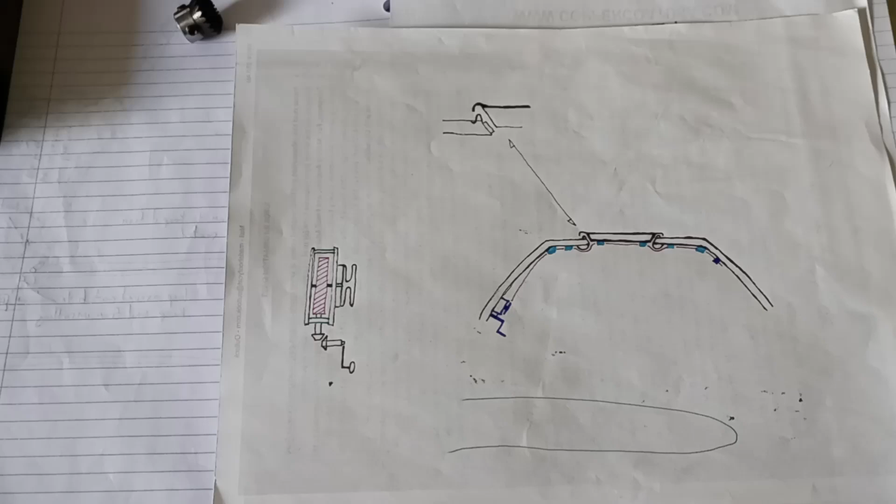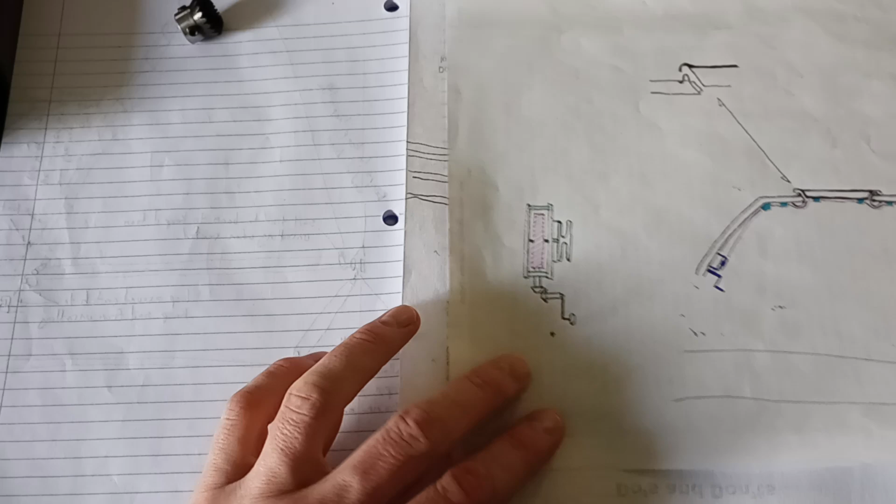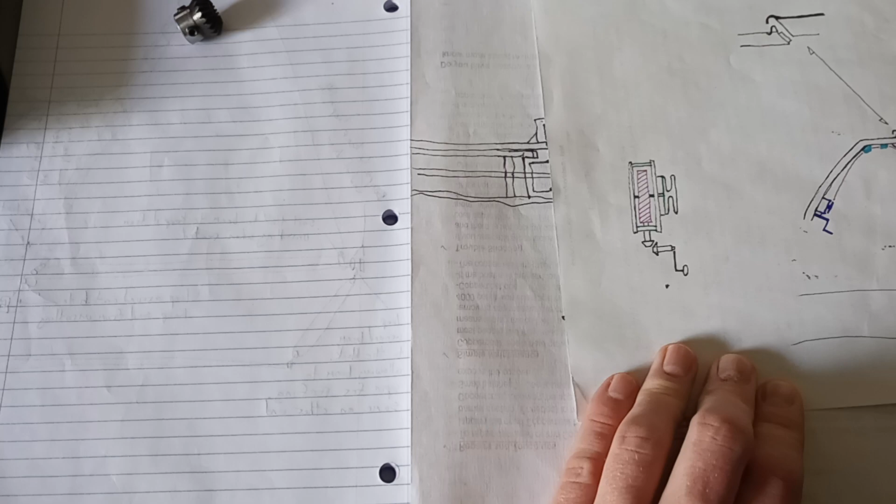For those of you who remember my wedge hatch video, I talked about this worm gear winch that I was going to use on the side to tighten the Dyneema lines used to hold the hatches shut. I mentioned how I was going to figure out how to make these since nobody makes something this small, so I started trying to figure out how I was going to do that.

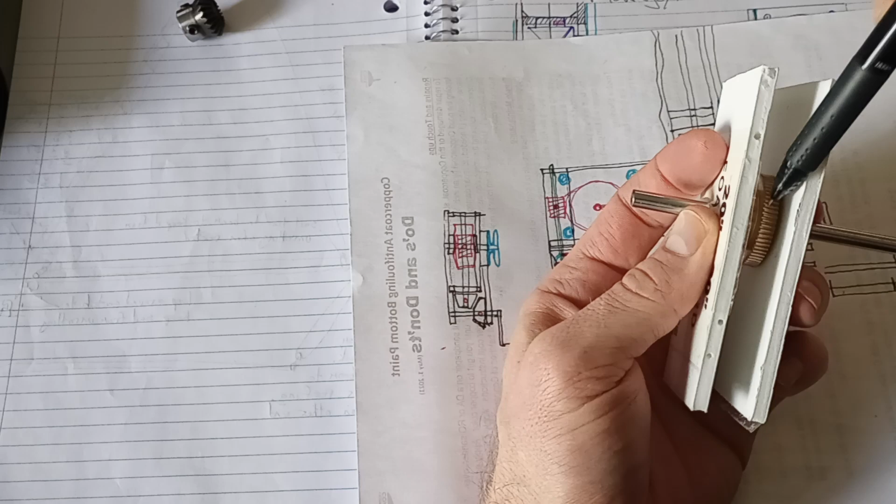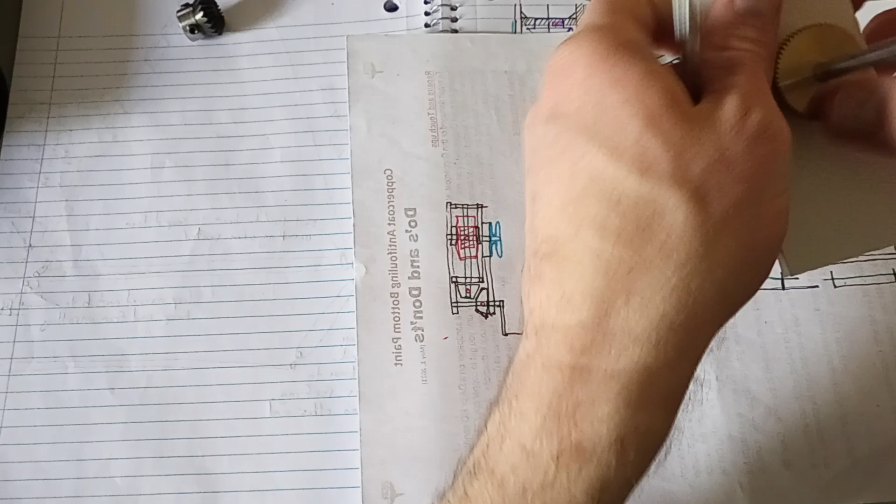The problem I was having was with this gear. So this is a small idea of it - that's the gear in here, that's that gear. It'll be a box with the gear inside, and then you'll have this gear coming in up here. As you twist this shaft, you turn this gear, and as you twist this one turns. So this gear right here would be this gear here, which is the side view of that gear.

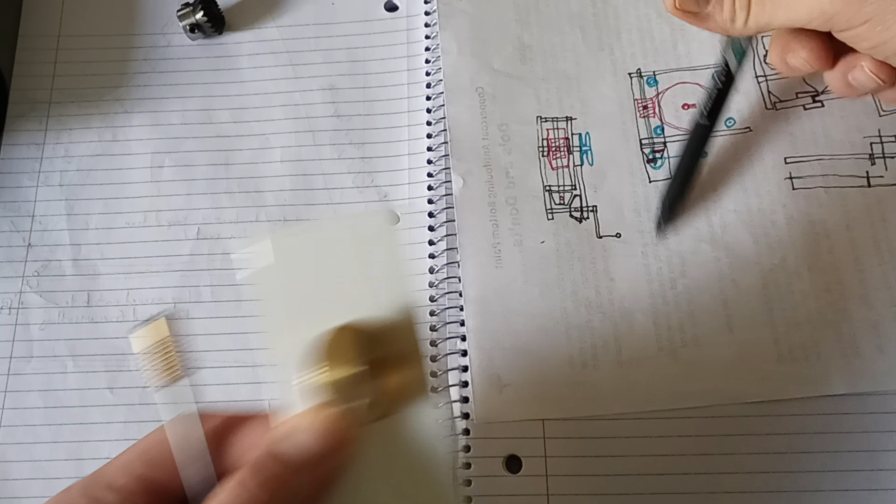Since it's on the side of the boat, this would be mounted up against the side of the boat. I can't put a handle down here because the handle runs into the side of the boat, so I had to come up with some way of bringing the handle out.

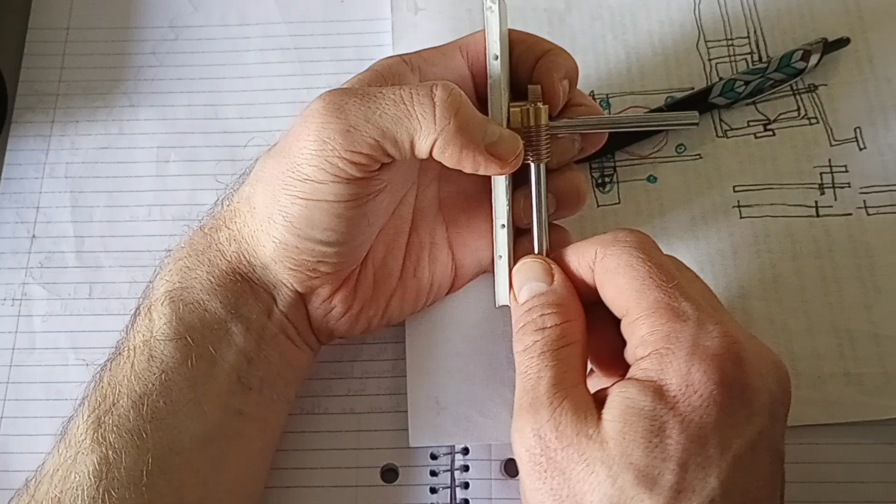So my idea was, I'll take several different gears like this. Looking at the side here, this would be mounted up against the side, you got that gear there. So I needed some way to bring a handle out away from the wall. I was like, okay, I'll put a gear in there like that with the handle attached to that one, and as this turns, that turns.

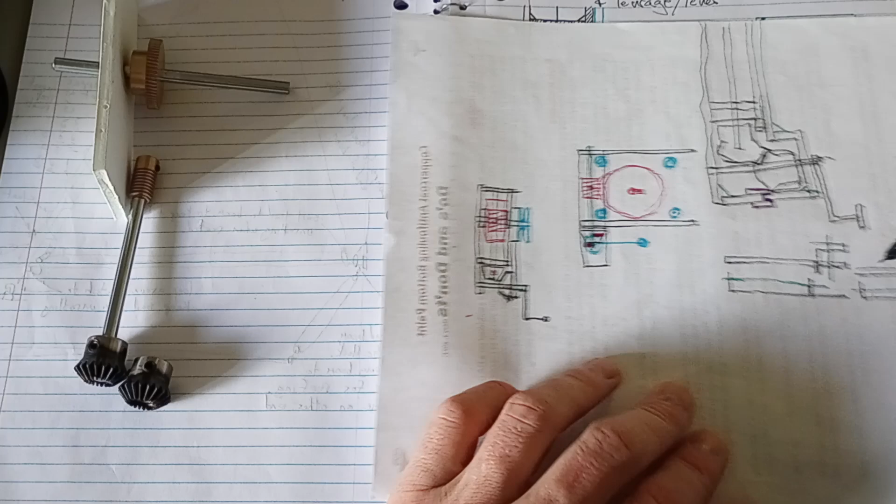So I was like, okay, well how can I... I just started messing around. The gear comes down, we got that gear, and then I'll put that gear there with a shaft going across, and then I'll bring the handle out. Well, I want to keep it as simple as possible, so I'm trying to figure out how I can keep the body of the whole thing as low profile as possible.

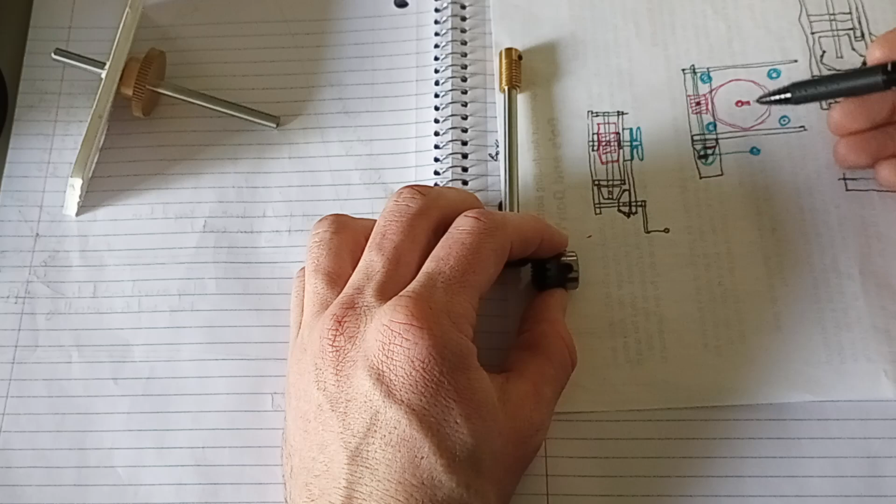And also incorporate these gears. As you can kind of see, if the main body of the gear is low profile, but then you have this gear sticking out and the handle sticking out, then you got this thing jogging out like that. And I was like, how do I do that? So I was messing around with it more.

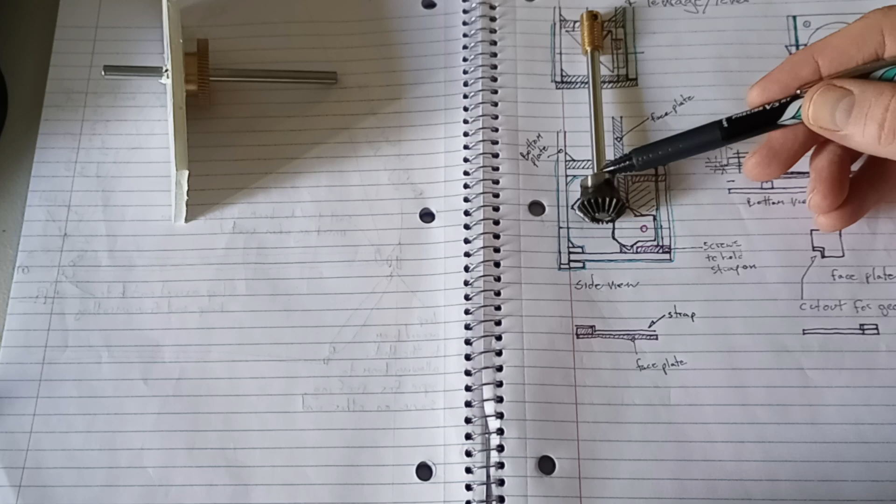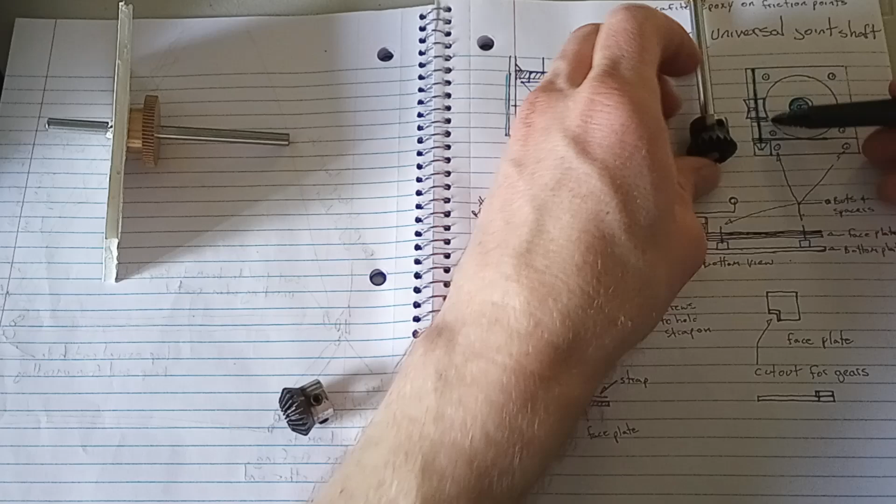It's like, okay, so we got the body here, we got the gear coming down, the shaft coming down. Here's that gear again, something like that. This gear is up here, and then you got this gear coming off to the side. Well, I'm still trying to build this box at the bottom here - you can see right up here, got the gear coming down. So I'm like, okay, I'll build this weird little box here that'll contain this gear.

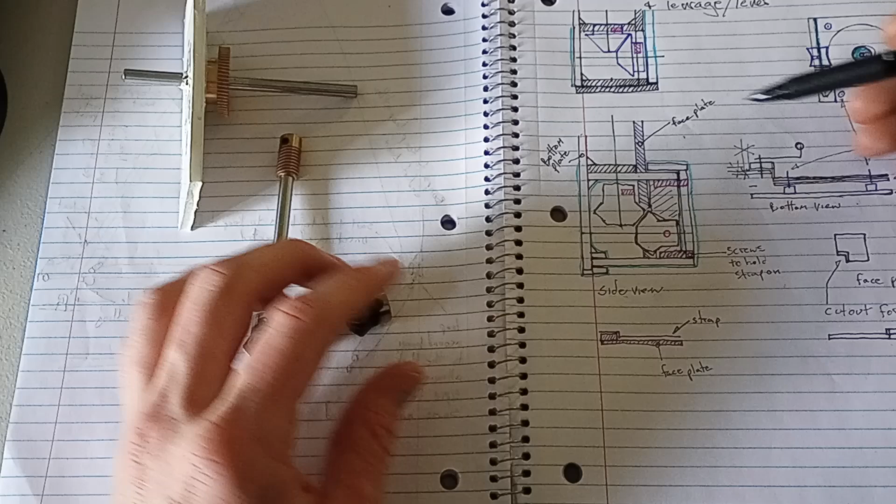And I kind of figured, okay, in my head I got it figured out, I kind of know what I'm doing. I was thinking, this is complex, I don't want to make this complex because I'm going to have to build these by hand. So what can I do? I was thinking, what can I do? Oh, freaking Rockefellers - I remember a very simple thing.

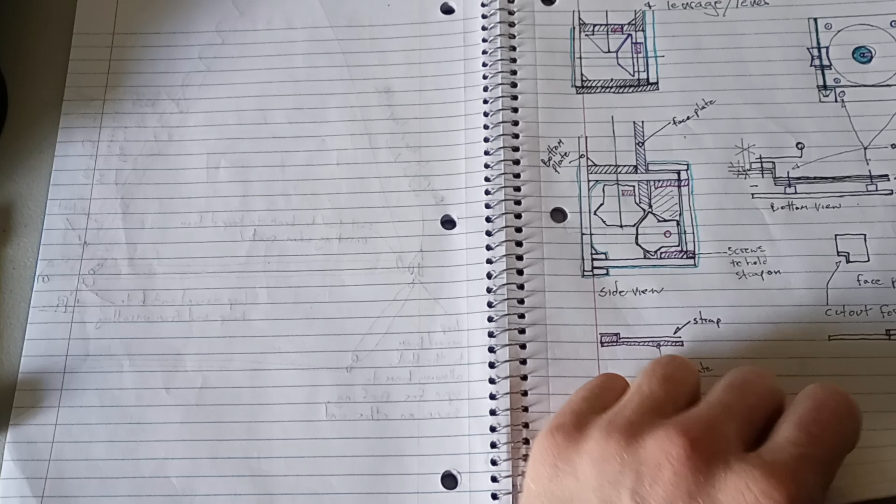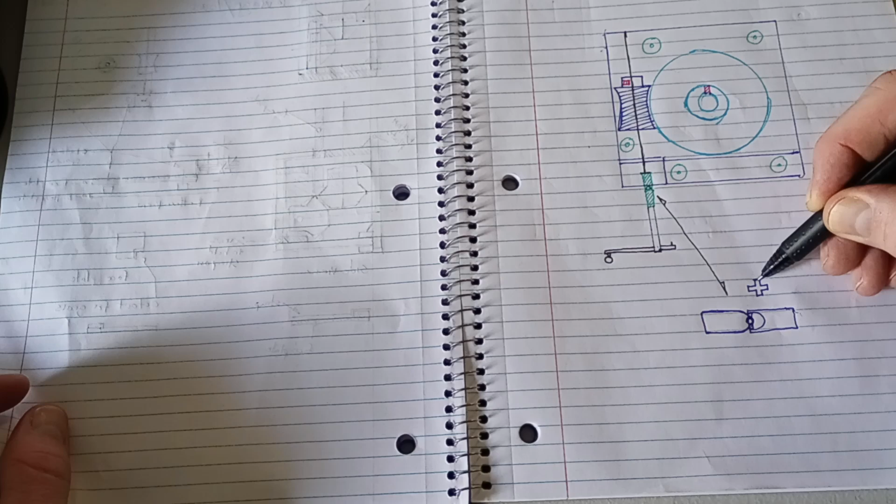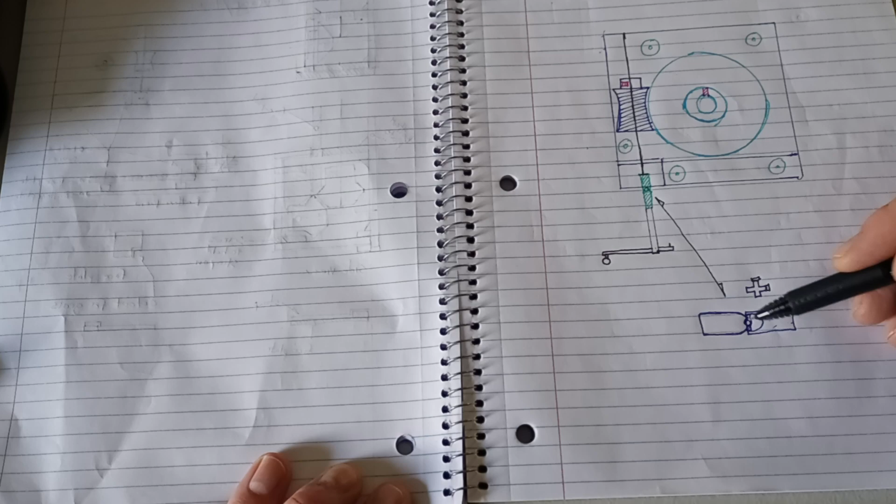Very simple thing, this little thing right here - what's it called? It's called a universal joint shaft. What is that? Well, basically you got an X here that's got bearings on the ends. And then you got these, what do you call them, bodies - sockets that attach to those 4 points. Essentially it doesn't matter where you orient these things, you see these are on cars. What it allows you to do is turn a shaft that's at different angles. It's an amazing joint.

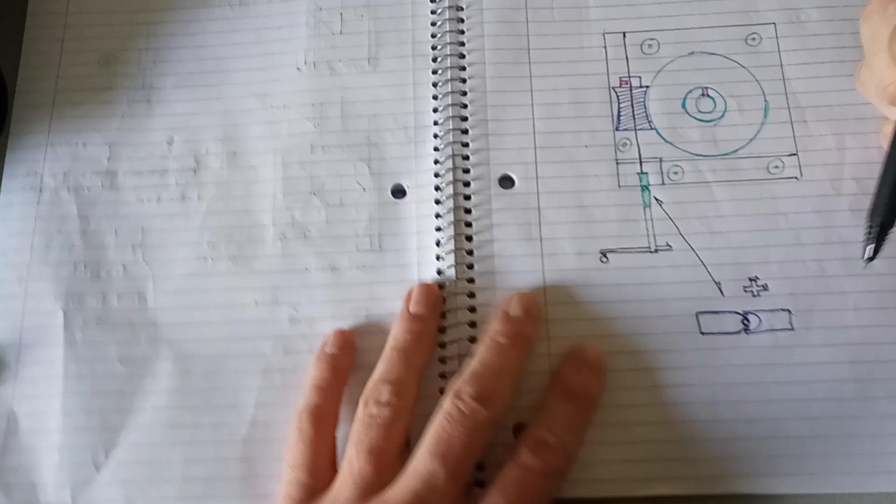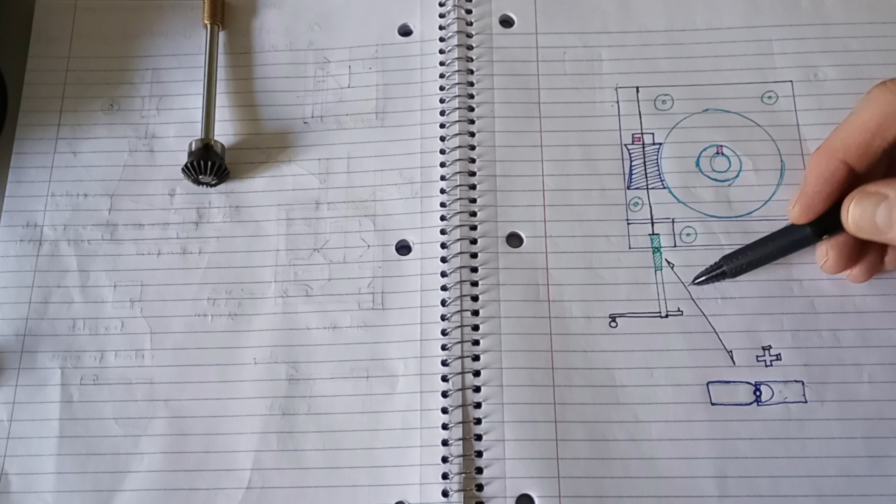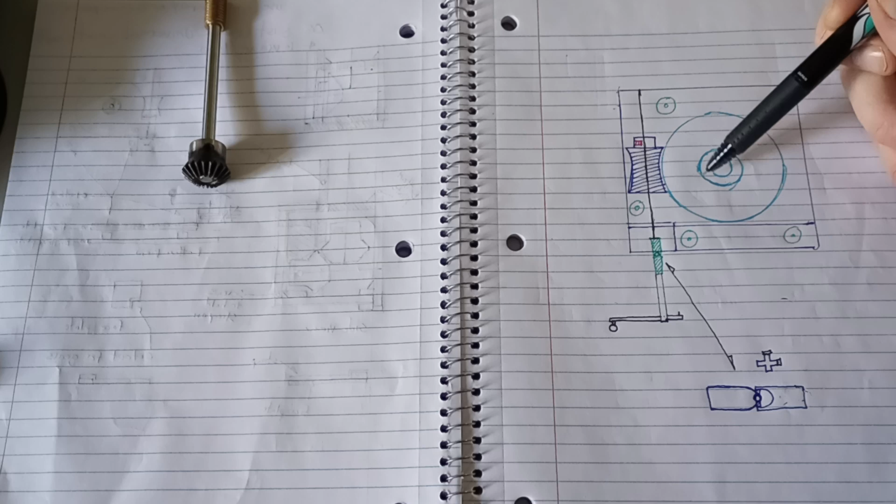So if I run this shaft down and simply cut out a small square here, keeping everything within the body - so this would be the gear, got this shaft coming down - and then I just put this universal joint right there. What that allows me to do is put an extension on there, and then the leverage from the handle. So basically I'm able to tighten everything down extremely well because I got good leverage here. This bar can slide, I can put two hands on it, I can take it out so it's not sticking out anywhere. And it's a simple solution.

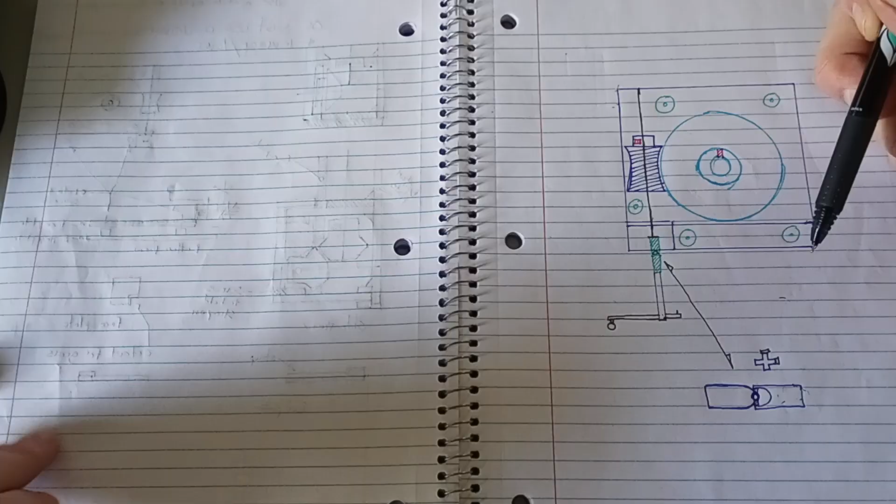That's it. You just want to kick yourself sometimes when you're thinking way too complex. I mean, I'm just like, well how do I fit this, how can I make it all in one piece, how can I do it anyway? So there it is - keep it simple.

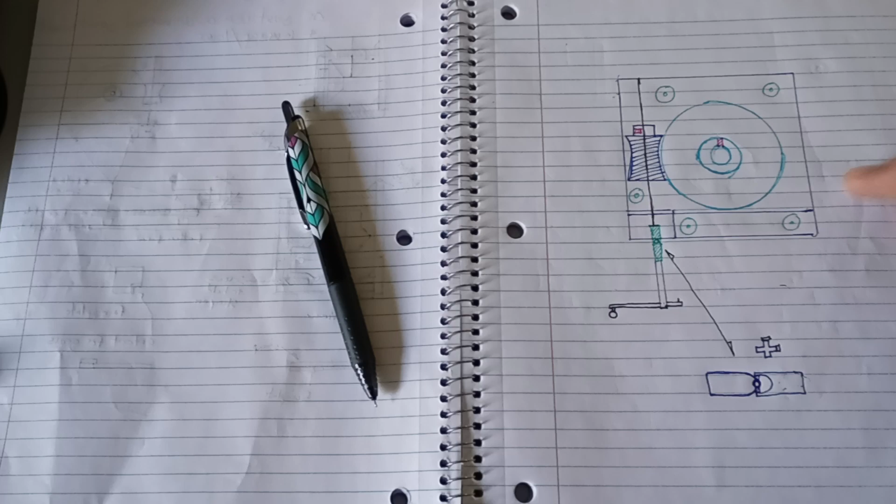And so, that's not very interesting. I haven't posted lately because I don't really have any interesting details to post. So I'm not sure how many videos I'm going to be able to put out between now and summertime when I finally get back to the build. But we'll see. I thought this was a good example of overthinking something and then suddenly coming up with a solution that's 100 times easier. So hope you enjoyed - till next time.